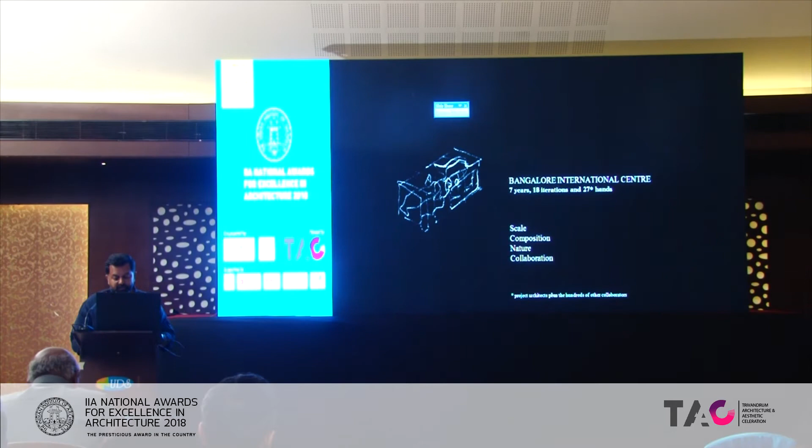So here's 7 years in 7 minutes.

The Bangalore International Center is a non-profit public institution funded by donations from members and private individuals. Since starting in 2005, the BIC has hosted some 800 events, all of them free and open to everybody. This public, accessible nature of the BIC has informed our proposal fundamentally.

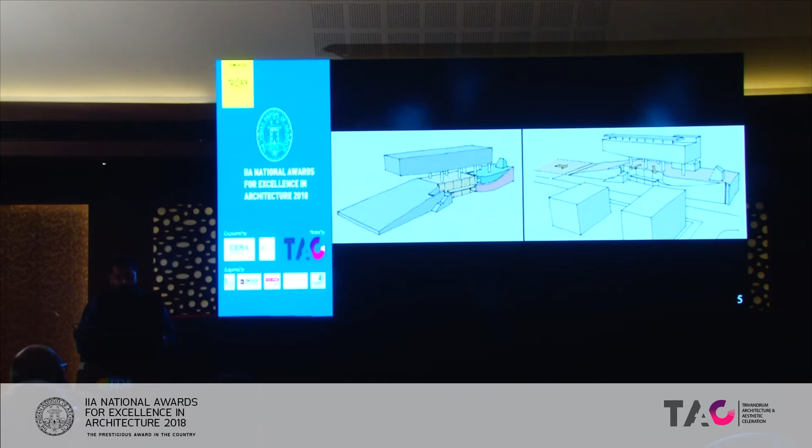In 2012, the BIC invited proposals to an open competition for this new facility on a 2,000 square meter civic amenities site in Bangalore. Central to our winning team was a public space elevated to the second floor and visible from the street, announcing the agenda of the BIC to be a democratic institution where public participation was its core concern. Or, as one astute BIC member observed, the Starship Enterprise had landed in Domlur.

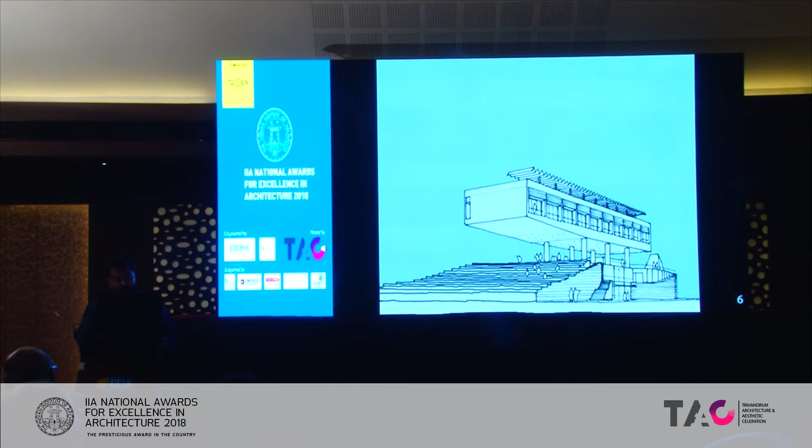Then the site profile changed, getting narrower, and we lost a floor. Yes, that wonderful public room on the second floor and the amphitheatre, both central ideas, were both gone. We were now thinking of an envelope with the public spaces spread out within this.

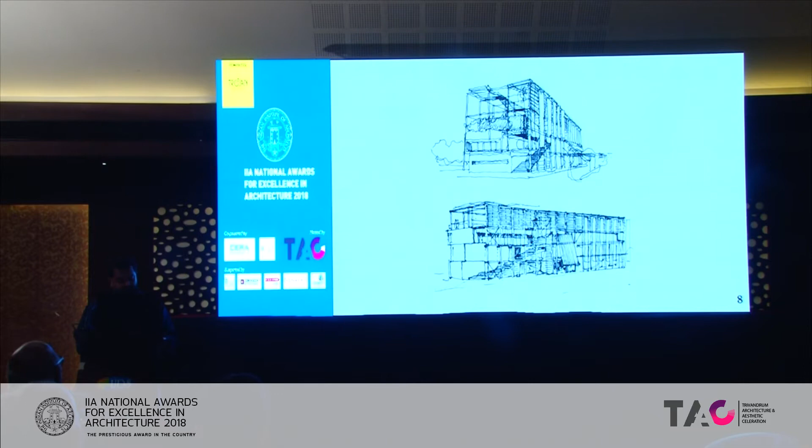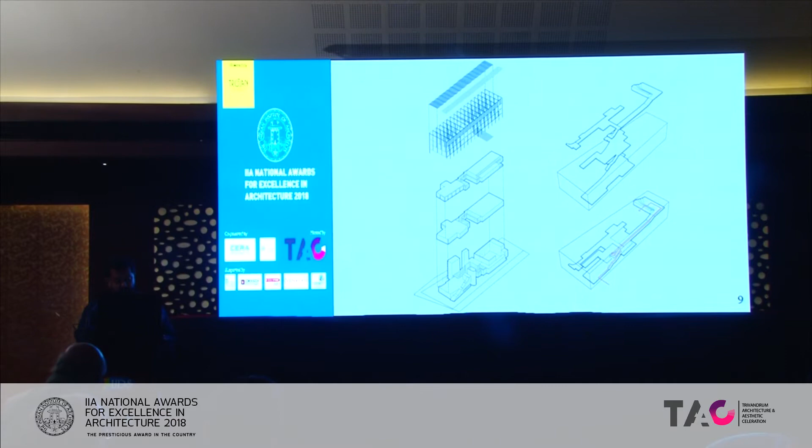The various program components stacked up on 3 floors around a small central lobby. The diagram on the left shows this loose arrangement of program and meandering circulation enclosed within a metal frame. The diagram on the right shows the shifting of the primary entrance to the southeast corner, and this opened up a long promenade within the building to access all the program components and is a trace of that original idea of a prominent public space finding architectural expression, now on multiple levels, all visually connected. This free, unlabeled space was to accommodate all kinds of activities, from art exhibitions to small performances and workshops.

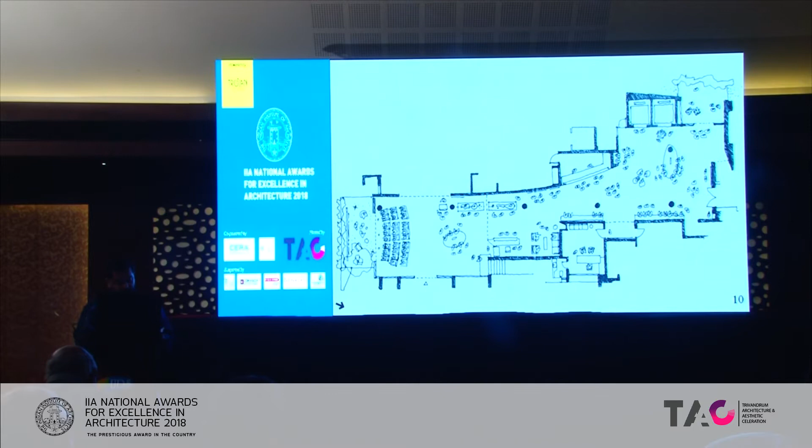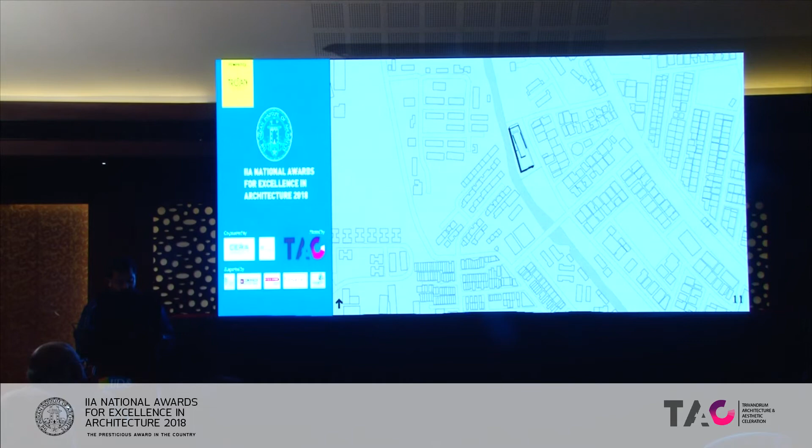The BIC sits in a low-rise residential neighborhood with a large public park on the south, a stormwater drain along one edge, and army lands on the north and west. The primary access is from the south, and the long elevation of the building is always seen obliquely from this end. A concrete frame runs along this eastern facade, establishing a vertical datum in contrast to the varying scales and character of the neighboring residential buildings.

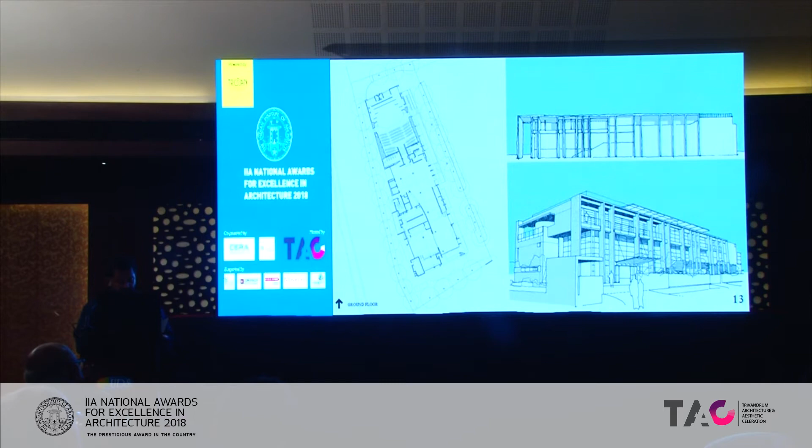This austere facade is then enriched and its cadence affected by the variations in material expression and spatial composition as programmed from within encounters it, resulting in a facade that operates differently based on the distance from which it is perceived.

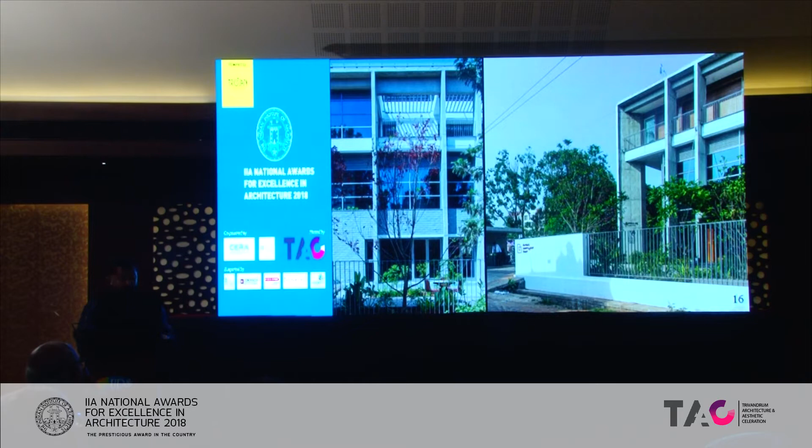Along the east-west axis of the building, one encounters multiple layers of different materials, contrasting levels of porosity and varying scales. On the ground floor, there is a cafe on the bottom left, and the main entrance to the auditorium on the top, and in the center is the kitchen which serves the cafe and a pantry open to the lobby and shared space. The brick wall, encountered head-on when one enters, is a dramatic contrast to the glazed outer enclosure.

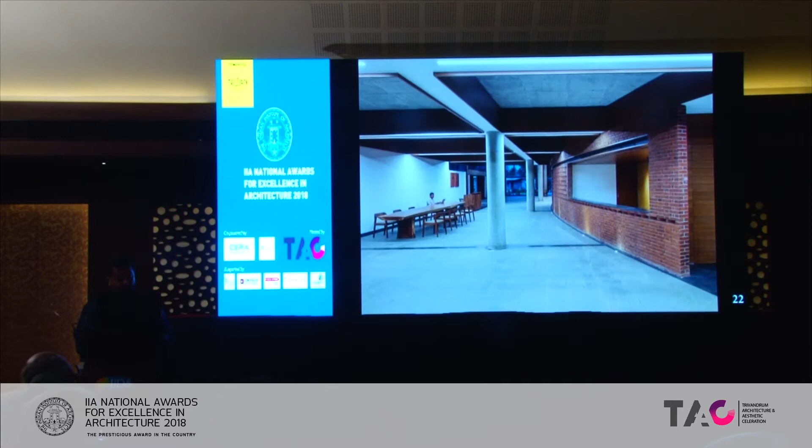Archaic, seemingly here before everything else, the sweep of it a forceful counterpoint to the ordered grid of the rest of the structure. There is a restaurant on the left on the ground floor and the oculus connecting this level to the next and marking the entrance to the auditorium.

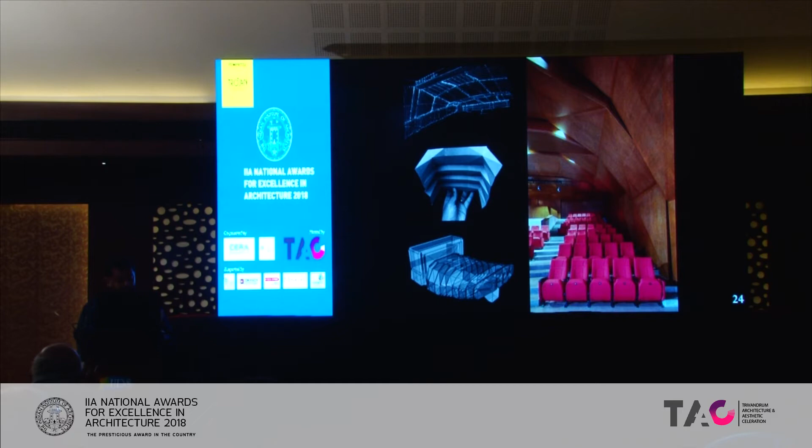The 190-seat auditorium is the heart of the BIC. The richly articulated inner plywood shells are inflected to perform acoustically, making this a natural sound box. Scale then, so here are some pictures of the auditorium.

Scale then is the first principle, and to achieve both appropriate scale of a civic institution and sensitively address the small-scale residential character of this context. Also important is the quality and variety of scale within the building, offering both places for large congregations and intimate rendezvous.

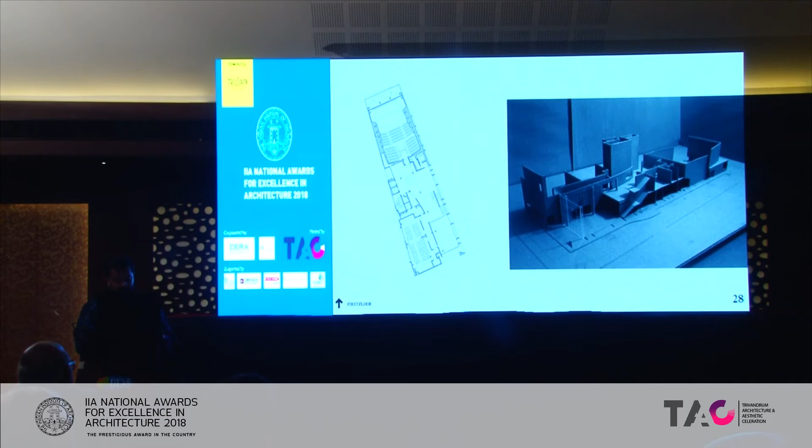The first floor has 2 seminar rooms on the bottom left and with an acoustical partition, access to the upper levels of the auditorium and a pantry serviced from the kitchen below by a service elevator in the center. There are generous public spaces on the first floor too, visually connected to the other floors.

The wide opening on the south brings in prevailing breezes across a water body and through the cascading north-south section, and louvers are provided on the uppermost part of the glazing to allow hot air to escape and induce the circulation of air through the building.

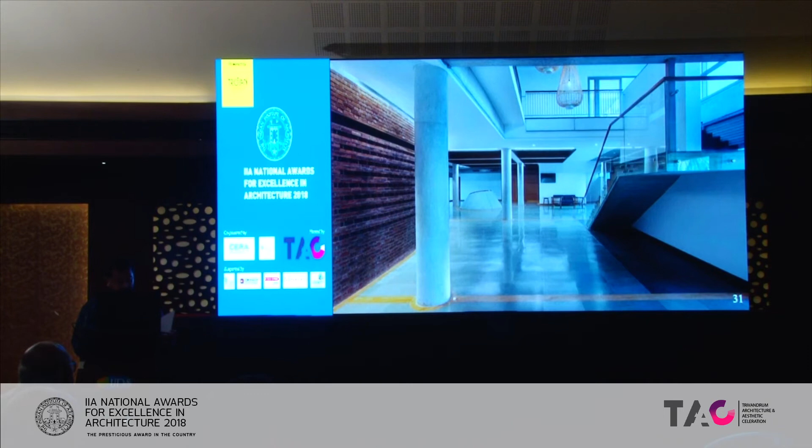Volumes and objects: the brick wall, the oculus, the stair, and the bamboo lanterns as counterpoints to structure. Here are the seminar rooms with the operable partitions in the middle.

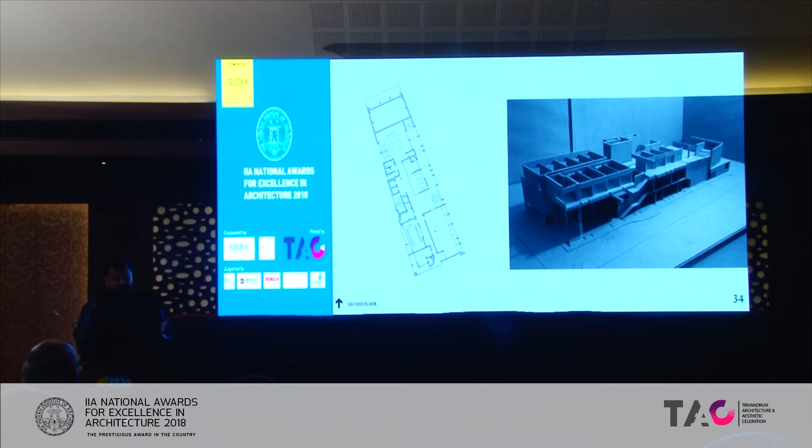On the second floor, there is an art gallery on the bottom right, a boardroom on the left, the BIC admin and director's office in the middle, and a library on the top, which opens out onto a terrace on the eastern side. The cascading section now seen from above, participatory space and the sense of the community.

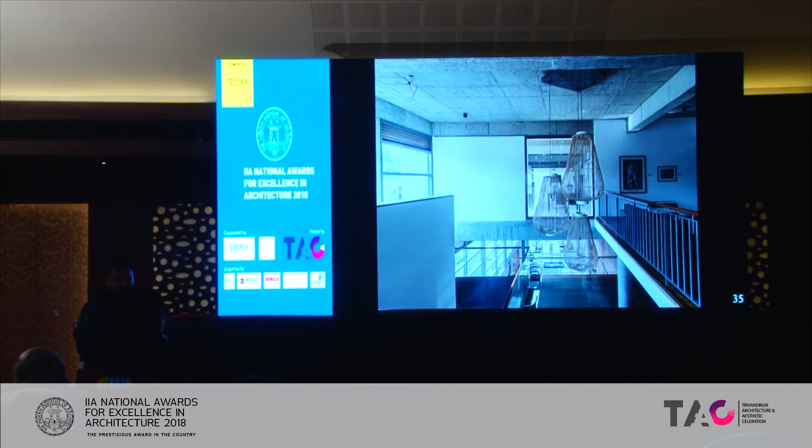The art gallery here showing Studio Maid's recent exhibition, and the library amongst the canopy of large rain trees of the neighboring army lands opening up onto a shaded terrace on the east.

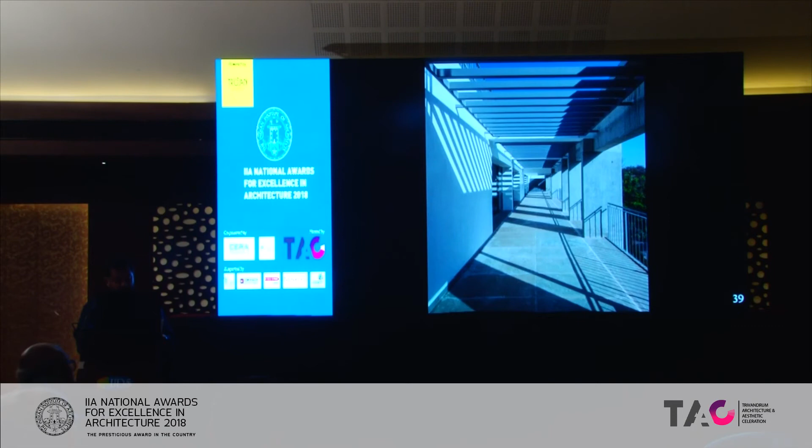Composition is the next principle. Given the mixed-use program, we've tried to use structure and the scale of common space to suggest movement, pause, and to help locate the various program components within.

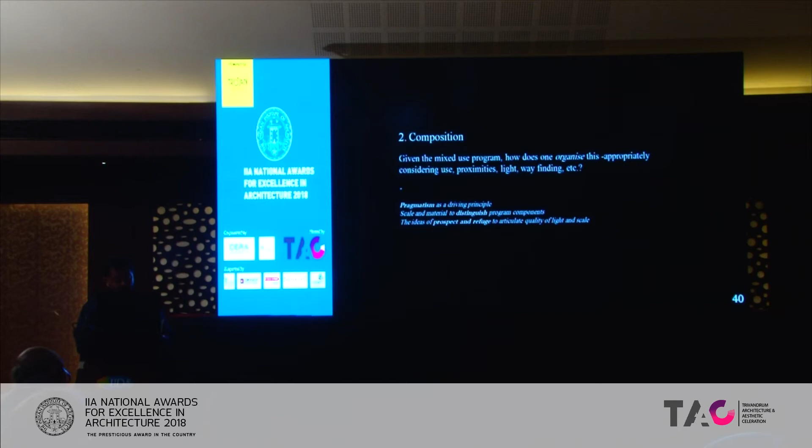The amphitheatre and party terrace and solar roof on the roof, which is generating around 28 kilowatts of electricity, all of the building's lighting load.

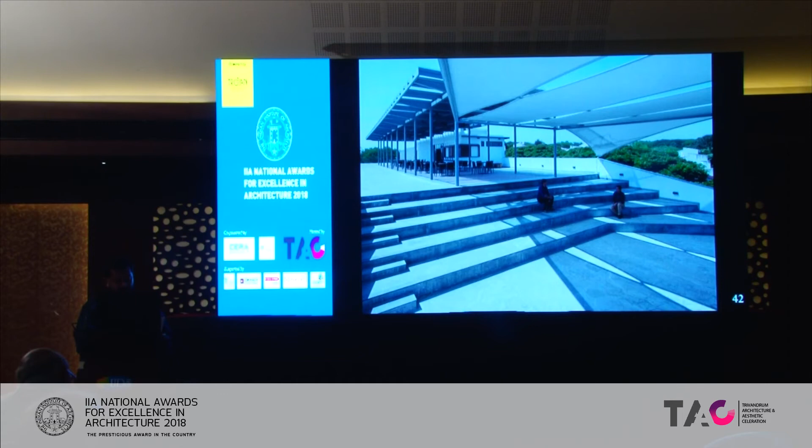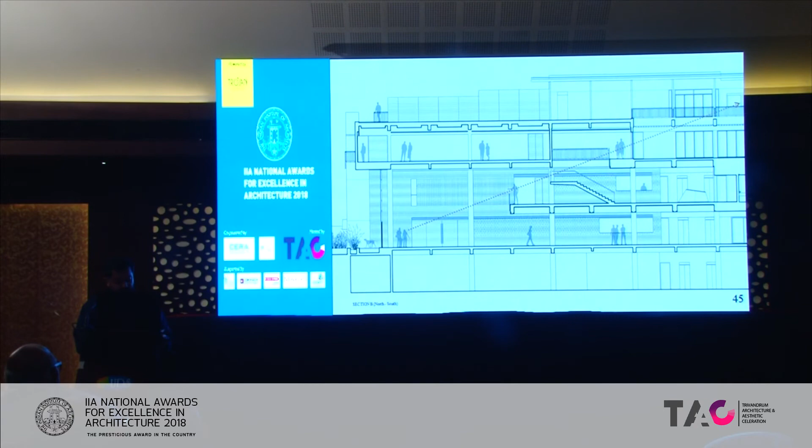The cascading north-south section connects all the way up to the sky, and the northern end of the section now shows the richly articulated internal volume of the auditorium and the library terrace above.

The section of the original competition scheme on the top shows the public plinth in a bold line weight on the second floor as an extension of the municipal park.

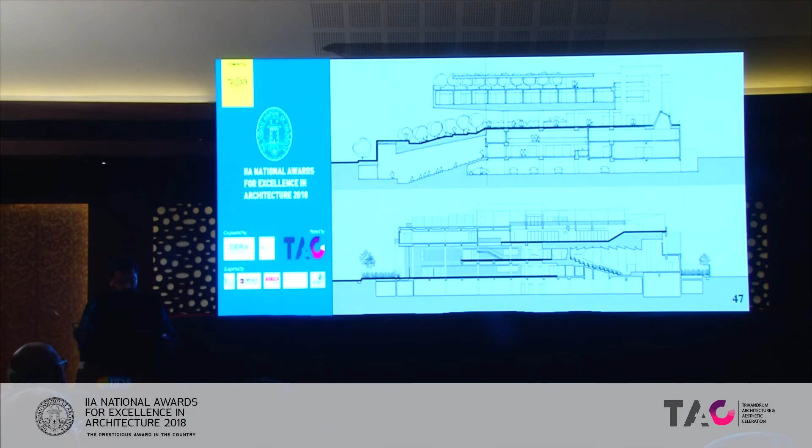The as-built section now shows this public realm on multiple levels and visually connected across the floors. And here are the public spaces again, shared common ground as a signifier of publicness.

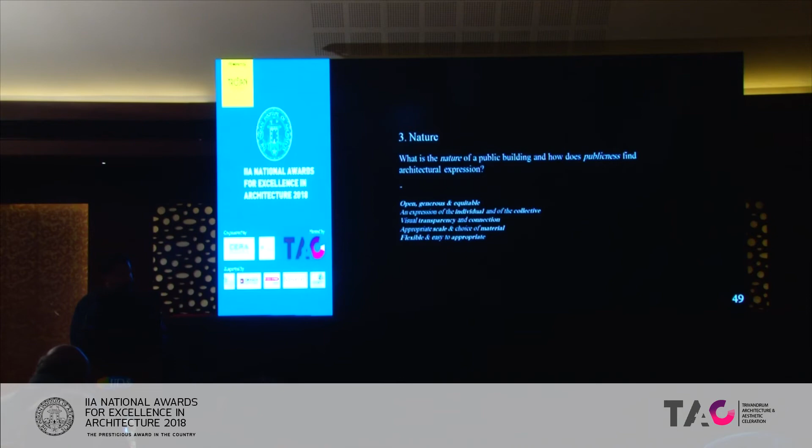Nature, as Kahn talked about it, is our third principle. How does publicness find architectural expression?

And here's finally a note on collaboration. When someone asked the artist Cyrus Kabiru what his glasses were for, he said they weren't for seeing better, but for seeing differently. A work of architecture requires the coming together of these different points of view. It is a conversation fraught with the risk of compromise and corruption, but sometimes also of opportunity and inspiration. It depends on the glasses we're wearing.

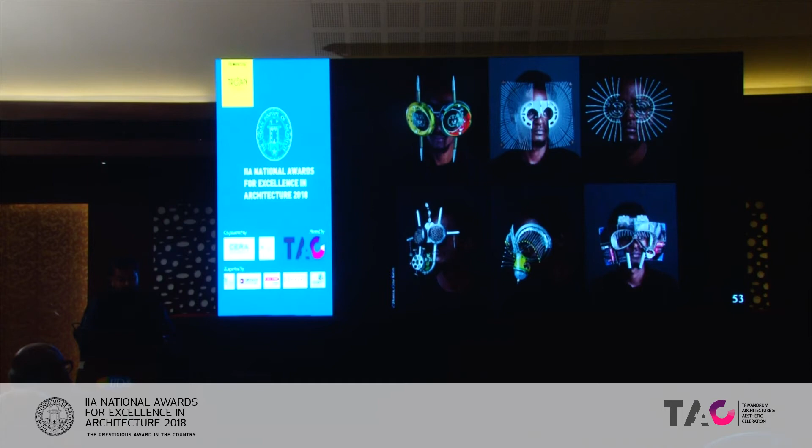Our wonderful colleagues, there's Harriet and Anna and Harshit, who worked on this over the past 4 years. And as Tod Williams and Billie Tsien say, this work comes from two voices and many voices. Thank you. Good morning.

I have an observation and questions. The observation is that the original sketches and conceptual drawings that were put together seem to have changed, or appear to change, considerably during execution. I think the quality of lightness has reduced considerably during execution. That's the observation.

Yes, I think in many ways the project is fundamentally different from the competition scheme. But I think that's the richness of this project, that I can't claim sole authorship of the end result, and it is the result of these conversations one has with the client over a long period of time. So at the end of the day, you see this project as a result of those conversations, and not as a solitary master architect making that wonderful sketch and then having that thing built. Yeah, that's right.